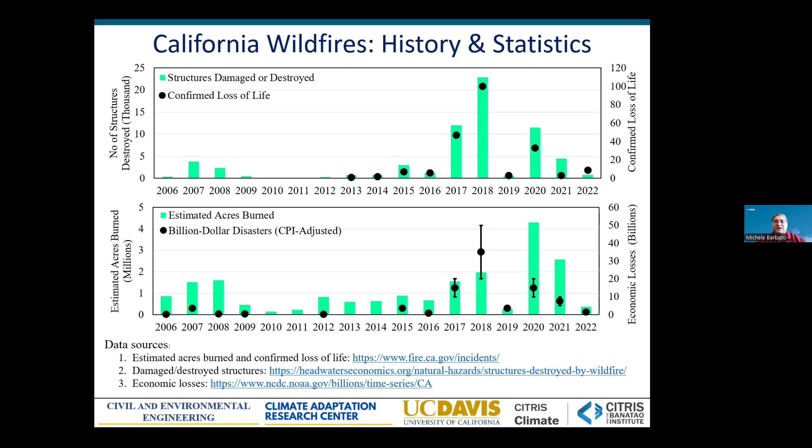Just to give an introduction to the problem, we have all seen from the news that wildfires are getting more severe, more intense, and are reaching communities. We have seen the LA wildfires just this year. So severity is increasing, and there are multiple causes. One is climate change, which is producing conditions that make wildfires more severe. But also a long history of very aggressive suppression of wildfires that has increased the fuel available in many places here in California and in the US.

And then a third tendency is the increase in construction, both residential homes and infrastructure, at the wildland-urban interface, the region where the built environment intersects with the natural environment and vegetation, and these are at the highest risk for wildfires. One important data point that is often neglected is the relationship between the damage produced by wildfires on the built environment and the direct consequences in terms of loss of life and loss of property.

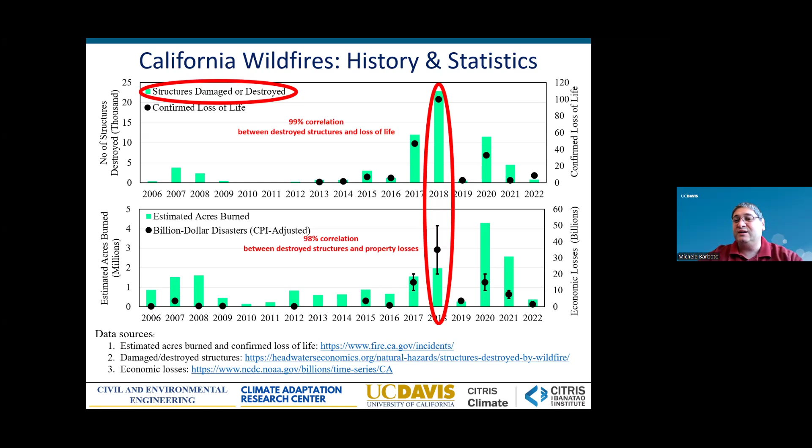So with this in mind, we started developing a research thrust on understanding how we can better protect our homes and our communities. As I introduced in the outline, we are taking two different directions. On one side, we want to understand and better model what is happening, particularly for what are typically called conflagration fires, where fire is driven by homes that are burning and becoming the source of fire for nearby homes, which is how communities are typically damaged. There is a need for assessment of these risks. Otherwise, it's very difficult to make science-based policy decisions.

And what we have found is that there are a lot of agencies from the state, from local governments, from federal government that are collecting data for wildfire applications. But as we unfortunately all know, there are a lot of silos that are communicating very little among each other. And so these data sometimes are simply incompatible and cannot be used for multiple applications besides the one they were developed for. So we are working on this framework to leverage the data that exists in order to have a better understanding of wildfire risk.

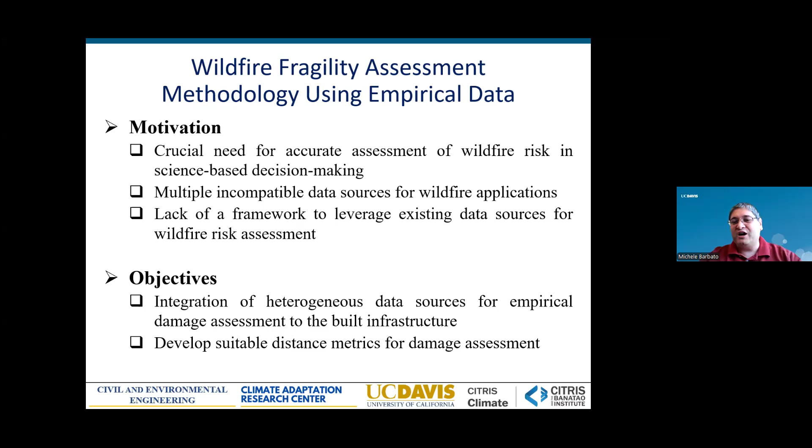So what are all of these data sources that I was talking about? We have data that are collected before, during, and post fires. There are defensible space audits. There are Microsoft footprints that can give us information on the dimensions of different buildings, etc. We have also information on vegetation. And this is all collected before any fire event, before even knowing where a fire event will actually take place.

And then there are data that are collected during the fire. So we know the location of the fire and we have information, for example, on the burn severity of the vegetation that is affected by the wildfire. And then post-fire, there are additional data collections done typically in the field or with satellite images that can give us information on the damage that has been exerted on different types of buildings, homes, and structures.

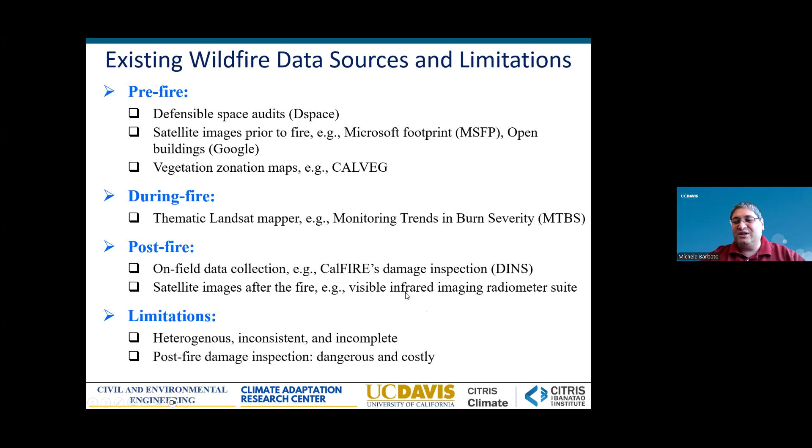The issue is that all of these different data collections are done for different purposes by different agencies. So there is not really a protocol to have similar data that can be used for other applications, like, for example, understanding the risk associated with wildfires. Some of these data collections are also very expensive and dangerous because they require physical presence of engineers, researchers, and other first responders after the fire has happened in a situation that typically is of destruction and thus complicated for data collection.

So what is really happening here? Just to give an example from the Tubbs Fire of the different types of data that we are trying to collect and put together. So on one side, we have the Microsoft information on the footprint that is given as polygons, so coordinates of corners. And these can give us the information on location of buildings and their size. We have then information that is given for the burn severity. The MTBS data set provides the fire perimeter and the burn severity with different types of data,

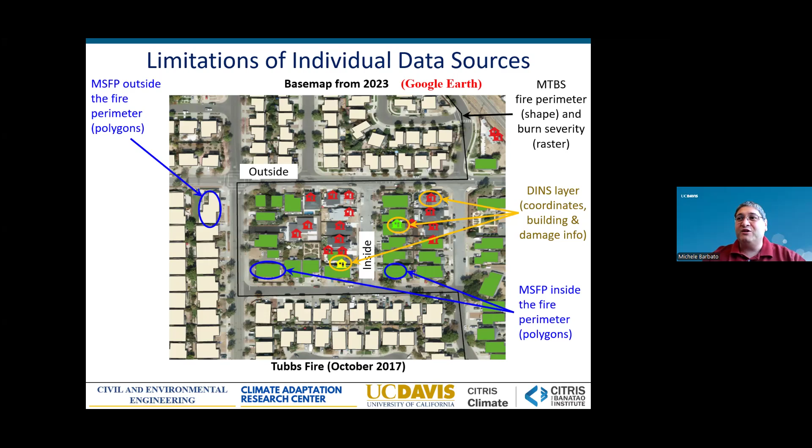different data types. And then we have the damage inspection layer, which provides coordinates of buildings, information on the characteristics of the buildings and the level of damage. And this is a little bit different depending if it is inside or outside the fire perimeter, because typically damage inspection is done only inside the fire perimeter. However, it is done at a time where the fire perimeter is not fully defined. And so there is some fuzzy region at the intersection between inside and outside the fire perimeter that needs to be adjusted in a certain way.

So why is there this need for adjusting, in addition to the fact that we need to make homogeneous a set of heterogeneous data? That is because there are buildings that can be missed in some of the different layers of data that we are using. For example, typically damage inspections do not spend a lot of time to inspect buildings that were not damaged. Now, that is a problem if you want to understand hazards and risk, because there is a non-survival bias that is introduced. We get a lot of information on what did not work, but we would like to have information also on what did work and why that survived. So we need to recover that information in different ways.

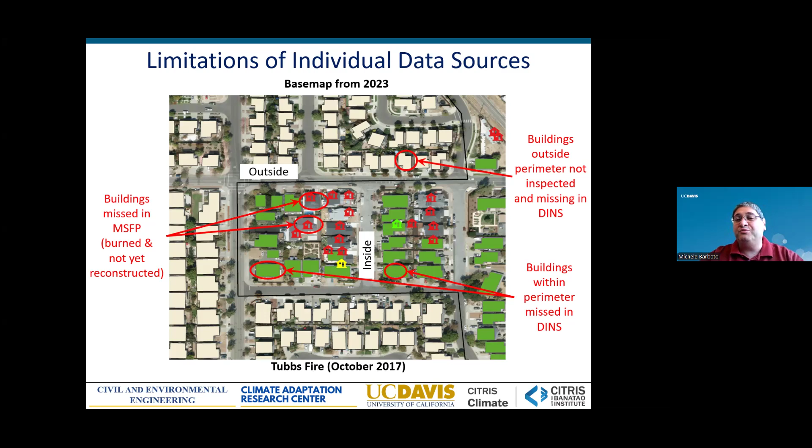Also, perimeter buildings that are outside of the official perimeter of the wildfires are not inspected. However, they were exposed to wildfire risk nevertheless. And so that's another layer of information that we miss to understand why wildfires were stopped at that level or why those buildings were able to survive. This is, though, a problem that is obviously quite severe at the edge of the fire perimeter, where it's difficult to understand what is inside, what is outside, because that fire perimeter, again, is typically not fully defined when the damage inspection is happening.

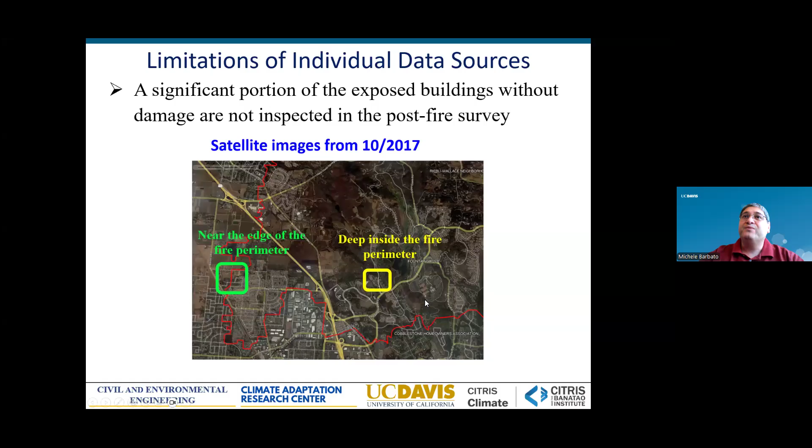However, this happens also deep inside the fire perimeter, where very often damage inspections for buildings that were not damaged are simply not done for various reasons. One is cost, one is time, one is that we don't have access to buildings that are occupied by their owners unless the owners are there to give permission to do that. And so a lot of that information, again, is lost, but is necessary if we want to perform a rigorous analysis of risk. So we need to recover these data.

And how do we do that? We need to go through several different steps that I'm going to try to describe here in what we are defining as a framework that provides us with a natural GIS tool to do this type of analysis. So we start with a Google Earth layer to have just the geographic characteristic of the location where the fire happened. And then we import into a GIS program or project the different layers that I have identified before.

In particular, we want to have the information on location and size of the different buildings and the damage inspection information that is available on all of the buildings that were lost or that were inspected even without damage. We also have to import the fire severity layer on the vegetation, which is giving us the information on the interaction between the built environment and existing vegetation. Also, all of these layers have different reference systems, so we need to rebuild all of the data into the same reference system so that they can actually be superposed.

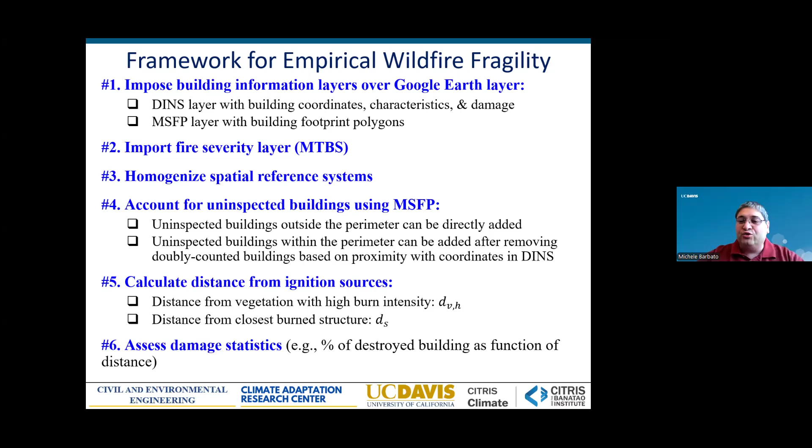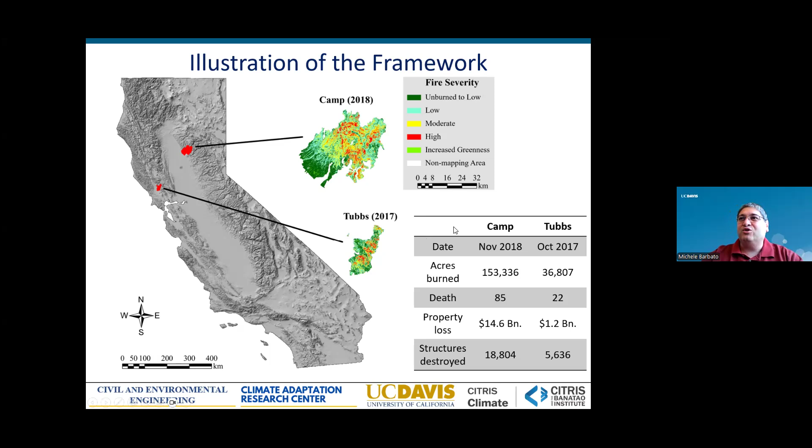So let's now show what this looks like when applied to actual historical fires. We considered two different fires, the Camp Fire of 2018 and the Tubbs Fire of 2017. Some of the information on property loss, number of destroyed structures. The Camp Fire is still the largest in terms of number of buildings that were destroyed, although the fires in LA, the Eaton fire and the Palisades fire together, probably are going to be very close once all of the information is collected.

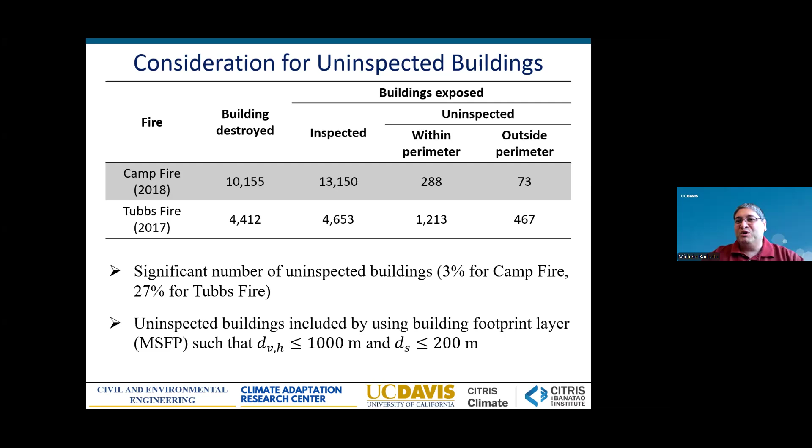So we started by trying to understand what is going to be the effect of including or not including the uninspected buildings. When we look at the numbers of buildings that were inspected or non-inspected in these two fires, we see that with the Camp Fire, actually, there was a big effort of trying to capture all of the information also on undamaged buildings. In fact, we figured out that only 3% of the buildings that were within the perimeter were actually not inspected. However, this number is significantly larger for the Tubbs Fire, where 27% of the buildings were uninspected. And so we expected to see small differences for the Camp Fire, but significant difference for the Tubbs Fire. And that was exactly what we obtained with our results.

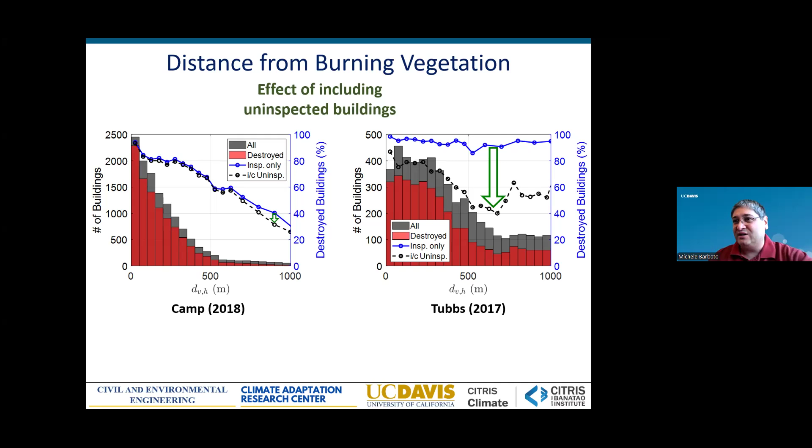And so now we can start understanding also for the Tubbs Fire that there is a dependence of the damage to the buildings on the distance, although it is not as clear as the one in the Camp Fire. And that tells us that just the distance from vegetation is not telling us the entire story. So that's why we also investigated the effect of distance from other burning structures to see if these fires could really be classified as conflagration fires more than as wildfires.

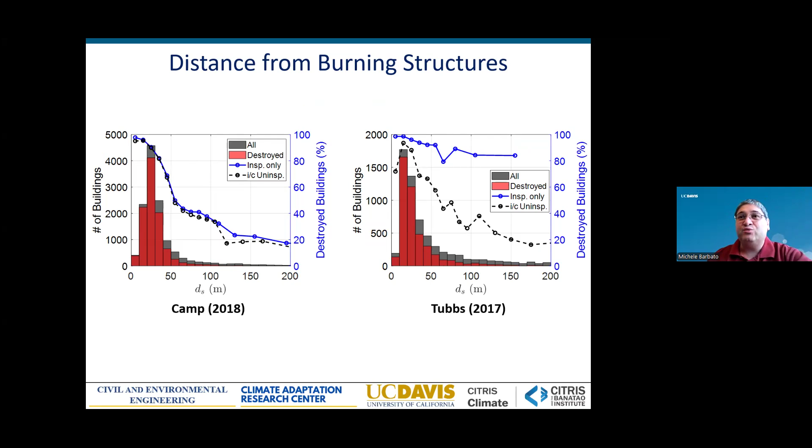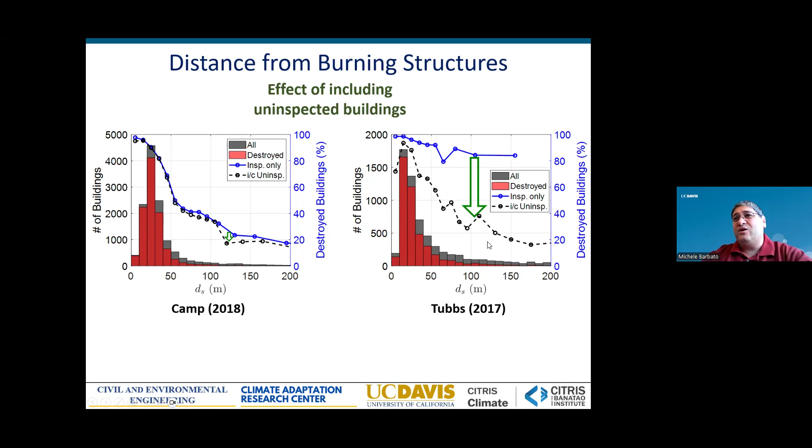And so also in this case, we found that the difference in the results between including or not including uninspected buildings is relatively small for the Camp Fire, with a much stronger dependence of the survivability of buildings on the distance from other burning buildings. And we find the same type of effect, but much more magnified, for the Tubbs Fire, where we start understanding that there was a strong driver, the distance between different buildings, in assessing if buildings were surviving or not.

So now that we have a little bit of a better understanding of how to evaluate the relationship between survivability of a building and distance from ignition sources, we can also investigate other aspects in understanding what is driving this risk for the different buildings. One thing we focused on was the presence of outbuildings. Outbuildings are fundamentally non-habitable buildings with a dimension smaller than 120 square feet that are located on a given parcel where there is another main building that is a habitable building.

So the hypothesis here is that since outbuildings with this classification do not require the implementation of Chapter 7A requirements, those that provide better resilience for buildings in the wildland-urban interface, these buildings are at a much higher risk to fire than the main buildings. Now, this wouldn't be a problem if the only thing that you lose is the outbuilding. Yes, it's never nice to lose anything in a fire, but typically these are sheds used for keeping materials and other things. So the risk to life by themselves would be low.

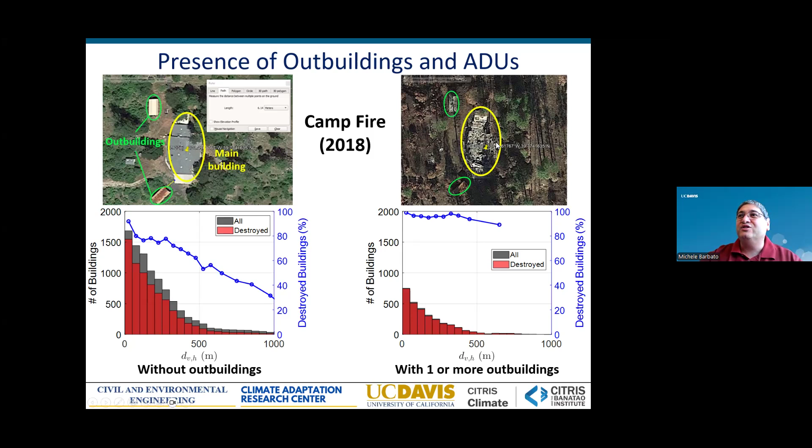However, if we look at buildings that had outbuildings, we find out that actually we lose that relationship. So the driving force is no longer vegetation that is burning, but as you can see on the right side, the percentage of destroyed buildings at a given distance practically becomes a constant, independent of the distance from vegetation. And our hypothesis is that this is driven by the outbuildings burning first and becoming the main source controlling the burning of the main buildings. So this is just the representation of the main buildings, the outbuildings on the property, and then the end result, that fundamentally everything burned.

Another application that we tried with our methodology is to see if we can identify the different ignition modes that are driving the loss of the different buildings. We know that there are three mechanisms with which fire can destroy a building. There is the most obvious one, that is contact fire, impinging flames from vegetation, nearby vegetation, or nearby buildings.

Then there is radiant heat. This is typically driving for fires that are driven by large trees that are producing a lot of radiating heat and are too close to the buildings, but also radiating heat that can be produced by nearby buildings that are burning.

And then there is ember attack of firebrands that are fundamentally driven by wind, can fly very long distances, and can kind of get all together in crevices or condensate around the surfaces of your building and produce ignition there, or penetrate through vents and other openings and then produce ignition of material inside the building.

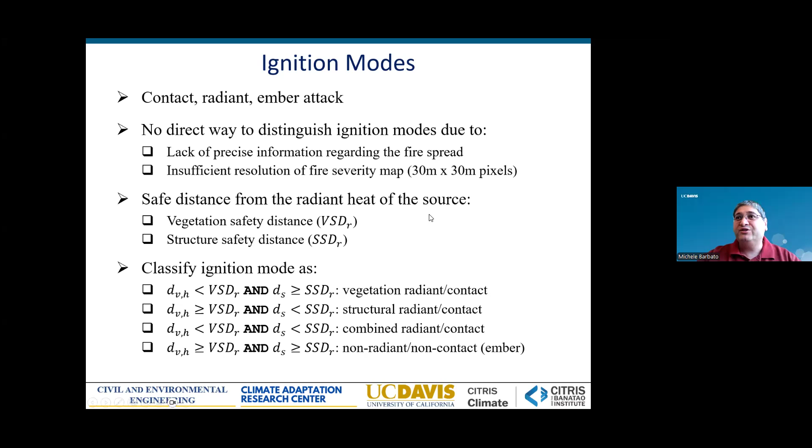Then when we were close to both vegetation and structures that were burning, we had the combined radiant contact ignition mode. And when we are far from vegetation and other buildings, then the only remaining possibility is a non-radiant, non-contact ignition mode, which is fundamentally driven by embers. So how does this analysis look for the Camp Fire and for the Tubbs Fire? It's really dividing the information into the 4 quadrants that correspond to the different types of ignition modes, which are here color-coded for an easier read of the information.

And then we calculated 2 interesting measures to assess the contribution of the different ignition modes, but also their severity. So the first information is the ignition mode contribution. It's the number of buildings that are destroyed and belong to a given ignition mode divided by the total number of buildings that were destroyed. So this is telling us the relative contribution of different ignition modes to the destruction of buildings.

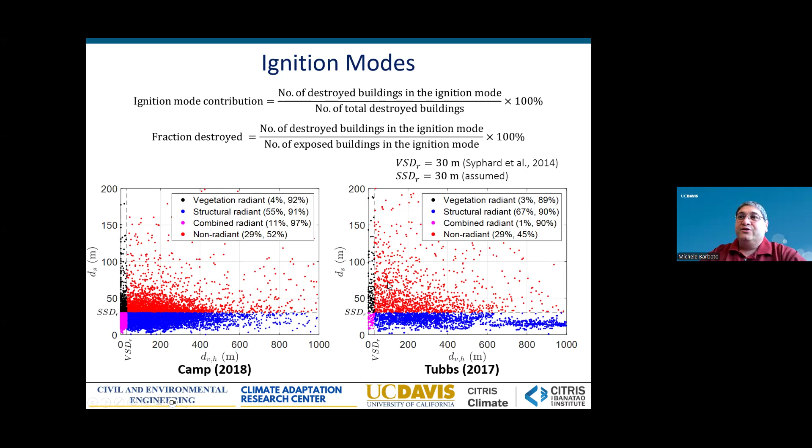So that's the information regarding the assessment of the risk. Now, what are we doing to reduce that risk? Our approach to that has been investigating different types of solutions, but the one that I've been focusing on the most within my research group is the development of fire-resilient construction techniques that are also affordable and sustainable. And that is because we do have a need, independently from wildfires, for affordable and sustainable housing.

And we want to have something that is more resilient to wildfires, because even in the best of hypotheses, homes that are wooden made and follow Chapter 7A requirements, we are at the point where the survivability of that specific building is only about a flip of a coin. It has been estimated in recent papers that the survivability of buildings that were pre-Chapter 7A is of the order of 10 to 12%. So 9 out of 10 buildings that are exposed to fire will burn.

And more modern, Chapter 7A compliant buildings have a survivability that jumps up to 52%. However, I doubt that any homeowner would feel very good knowing that the risk of their house being lost during a wildfire is just a little bit better than a flip of a coin. So we do want to have better homes.

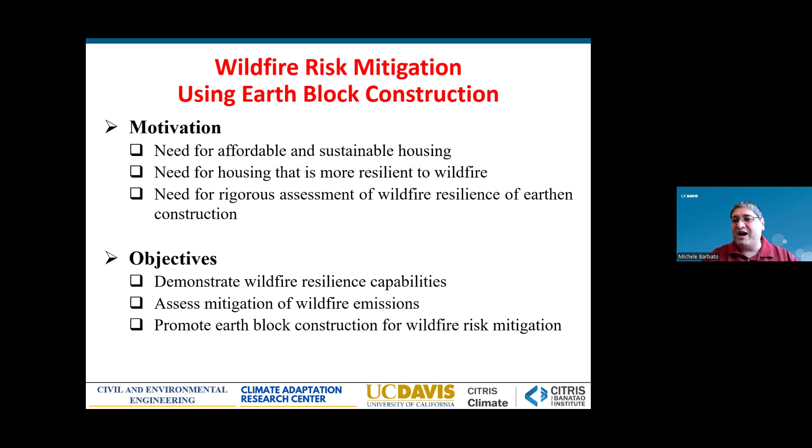And so what we want to do is investigate and demonstrate the wildfire resilient capabilities of this particular type of construction, quantify the additional mitigation that would be provided by using this type of construction, and in a certain way also promote earth block construction for wildfire risk mitigation. So what is earth block construction, or more generally earthen construction?

Earthen construction is fundamentally recovering a nature-based solution for home building that is based on the use of soil and clay. This is a very ancient, probably the most ancient construction technique after caverns, that has been used for more than 10,000 years. Even now, about 30 to 50% of the world population, depending on the sources, is currently living in earth-based dwellings, which are found all over the world.

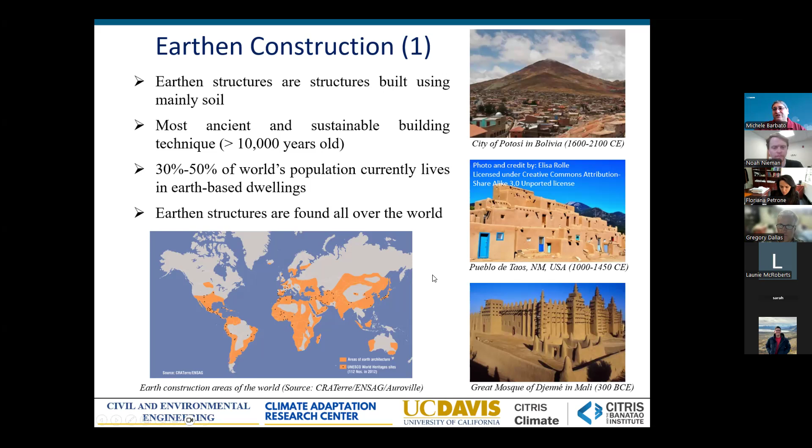This map that is shown here with the orange on gray is indicating all of the different places where earthen construction is found across the globe. And on the right side of this slide, you can see some historical examples of earthen constructions that have been built centuries, if not millennia ago, and are still standing strong. So we have a lot of historical success, but not as much information.

Also, there are different types of earthen construction that have been developed over the centuries: cob, rammed earth, adobe. I'm not going to go into the details, but fundamentally, cob is a construction of walls using layers of slurry of soil that are put one over the other until the walls are built. Rammed earth is fundamentally soil that is compressed on two sides into a given position, and a big example of that is the Great Wall of China, which is in many parts built using that technology.

And adobe is probably the most known one, where blocks and bricks are made with fundamentally clay and often natural fibers like straw. And then they are dried under the sun after being lightly compressed by hand or by foot. Now, we are not advocating necessarily to use the historical technologies. We are actually trying to use modern engineering knowledge and modern science to engineer this technology in a way that can be used in parallel as a potential alternative to modern construction materials.

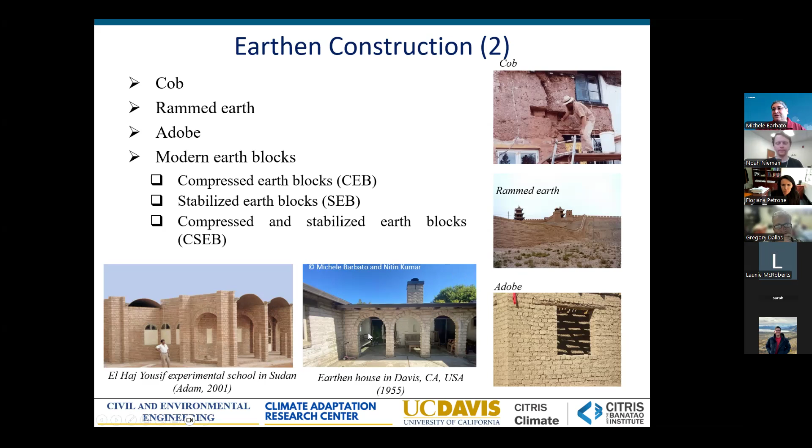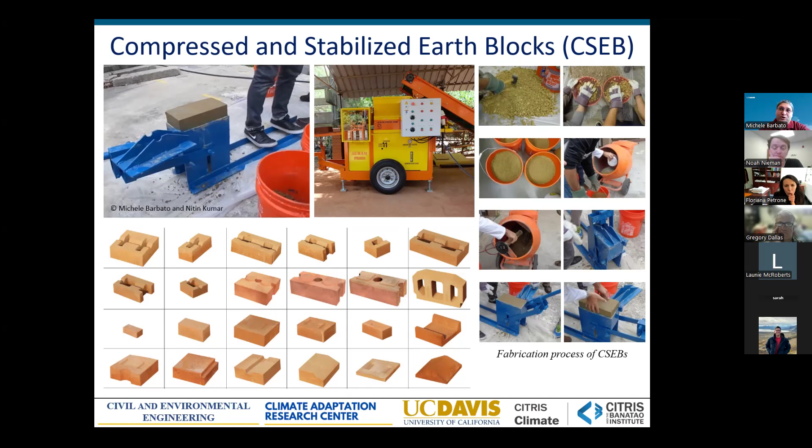Also, with the manual machine, we were able to produce 30 to 40 blocks per hour. With the hydraulic machine and 3 people working to just pour the soil on the conveyor belt, we can produce 400 bricks per hour, which is a big difference when we try to build things.

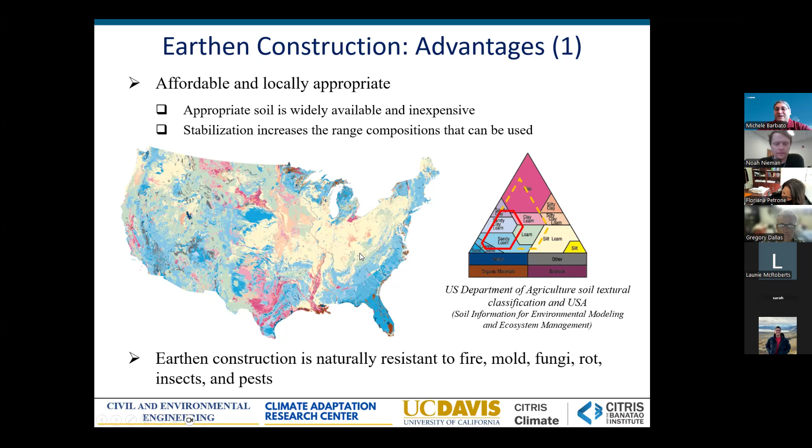Now, the result of that is that, unless you are building exactly at the deltas of big rivers where the soil is too rich in organic components and too silty, you can find soil that is appropriate for earth construction almost everywhere. And the soil that is used is naturally resistant to a lot of the different things that can be a problem with wooden construction. They're resistant to fire, to mold, to rot, to pests, to termites. So they are naturally more resistant, inert than organic material like wood.

Also, they are healthy and natural. They are a breathable material that is able to keep the relative indoor humidity always in the range between 40 and 60%. In fact, if the internal humidity is too high, this material is able to suck out the vapor from the environment in order to bring it down to 60%. And if the indoor is too dry, it releases back this humidity, bringing it above 40%. It does not produce any volatile organic compounds, which is very important for chemically sensitive people.

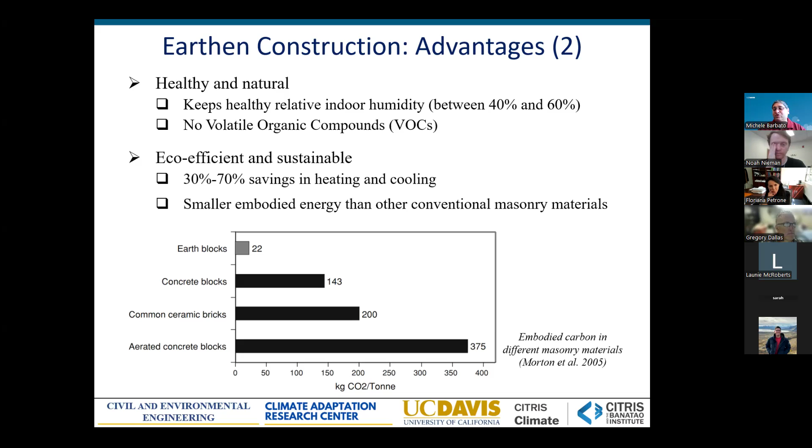It is also eco-efficient and sustainable. Given the high thermal mass, it allows, depending on the climate, a significant saving in heating and cooling, estimated between 30 and 70% compared with normal wooden construction. And compared with other masonry materials, which have similar properties except the healthy humidity, they have a significantly smaller embodied energy, at least an order of magnitude less than bricks and concrete masonry units, because the usage of cement is very low and the energy used to produce the bricks is only mechanical energy.

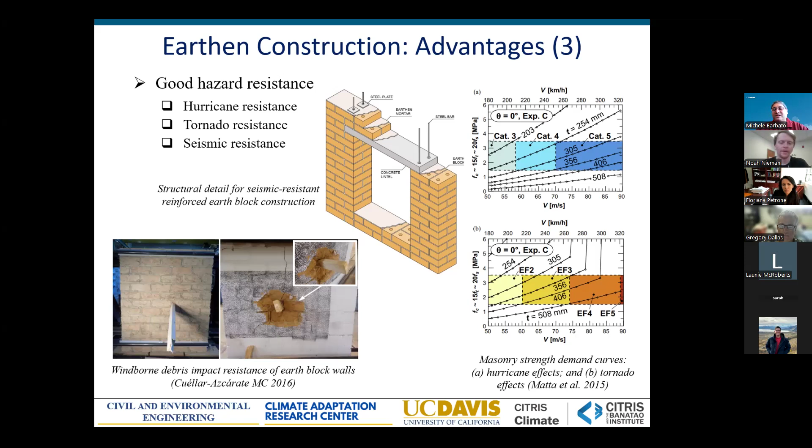In addition, recent research has shown that this material has good resistance to hurricanes, tornadoes, and seismic actions when used in conjunction with internal reinforcement. And so the question now is, can we investigate if they perform well also for fire? Now, I don't want to say that everything is perfect. There are also challenges. One challenge is the material is a natural material, so it typically has a higher variability of properties than other industrial materials.

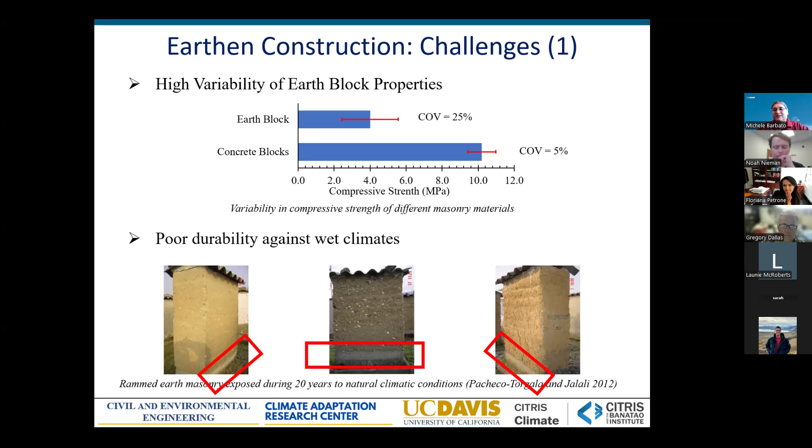Also, it typically has poor durability against wet climates, which typically requires the addition of lime and cement, which reduces the sustainability a little bit. So we need to know what is the right amount of cement or lime that needs to be added, so as not to produce material that is fundamentally greenwashed.

And then it is a masonry material, so it's characterized by brittleness, which means that reaching the peak then produces an immediate reduction in the mechanical properties. It is also, in the basic form that has been used through centuries, very labor intensive.

However, even though I want to discuss all of these different things, we have found technical solutions for each of these problems with new technologies that use interlocking blocks to reduce labor, addition of natural fibers to improve the brittleness, and quality control to reduce the variability of the properties, as well as a proper life cycle analysis to quantify the right amount of cement or lime that needs to be used for a sustainable material.

The major problem that we are still dealing with is really the widespread perception that earthen construction is a substandard choice. And this is mainly due to the poor performance of non-engineered earthen structures in other parts of the world, where, for example, in Turkey, they had a very poor performance under earthquake loads.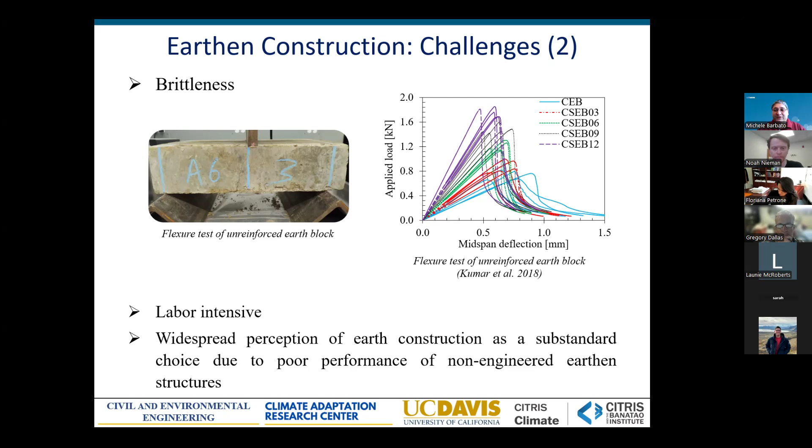However, even here, my point of view is that any material, when not properly engineered and designed, will perform poorly for loadings for which it was not designed. If you have structures in reinforced concrete or steel that are not properly designed for seismic actions, they will also perform poorly when subjected to that type of loading. So anyway, we went through all of this process, but I wanted to focus on the fire resilience.

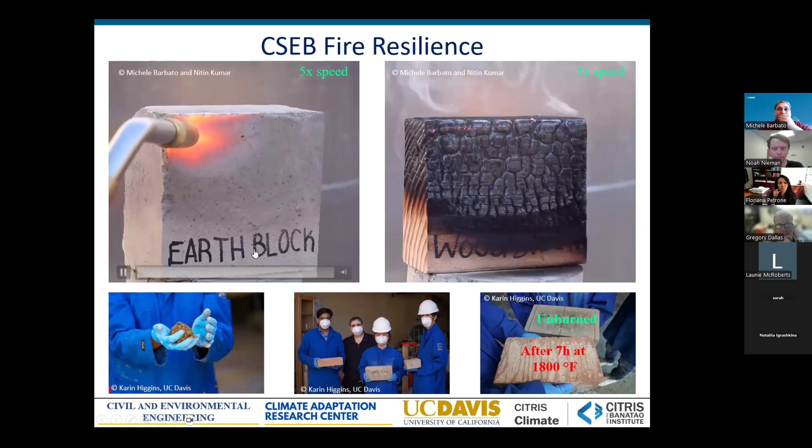And here you can see a quick and dirty test we did with a propane torch at 3400 Fahrenheit between our earth block and the typical wood blocks that are used for construction of wood-based buildings. And you can see that, as expected, the wood burns, and with the earth block the only thing you can observe is a little change of color.

And in fact, given this initial sanity check, we went and investigated the actual mechanical performance of this material when subjected to sustained high temperatures. We developed 60 specimens with natural soil collected from Paradise in California, the community completely destroyed by the Camp Fire of 2018.

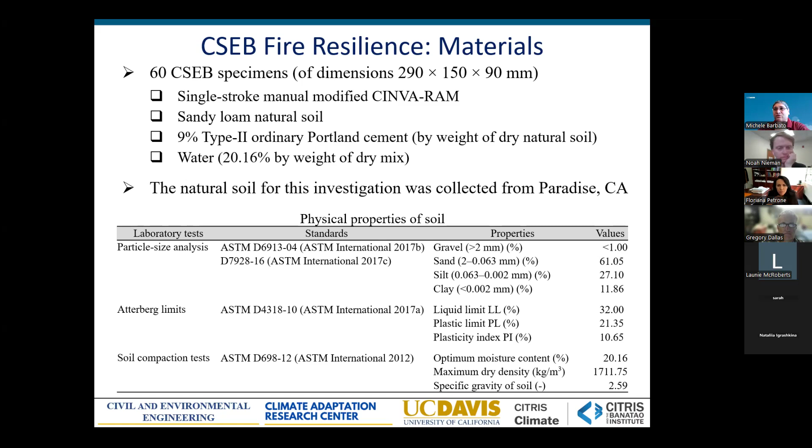And then we tested these blocks after exposing them to different temperatures. We left a group of blocks at room temperature, and then we subjected them to 200 Celsius, 400 Celsius, 600 Celsius, 800 Celsius, and 1000 Celsius. 1000 Celsius is 1832 Fahrenheit, which is kind of an upper limit for the typical temperature of wildfires that are only driven by vegetation.

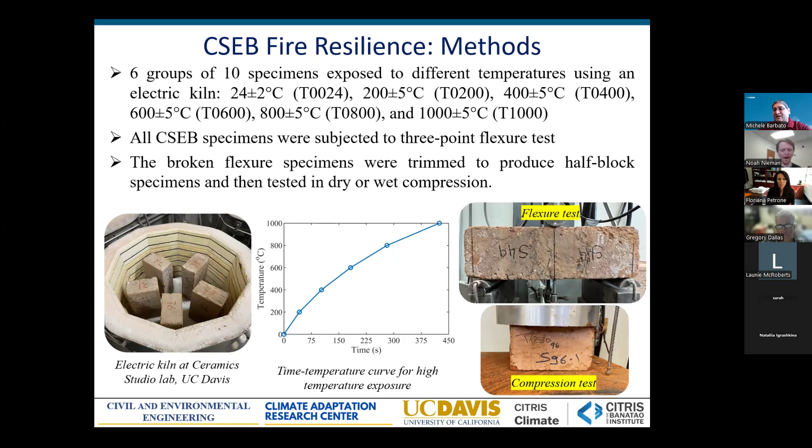And so we tested them under different conditions. First of all, in flexure, to understand how fire affects their brittleness. In compression under dry conditions, and in compression under wet conditions, which is typically the hardest test for this type of material. Here you can see some of the blocks tested at the different temperatures.

And here you can see this change of color from the typical brownish color of the unfired clay brick toward the reddish color, and this proceeds from the outside toward the inside until you reach, at 1000 Celsius, a uniform red color. Which in hindsight is simply telling us that the unfired clay brick transformed into a normal fired clay brick.

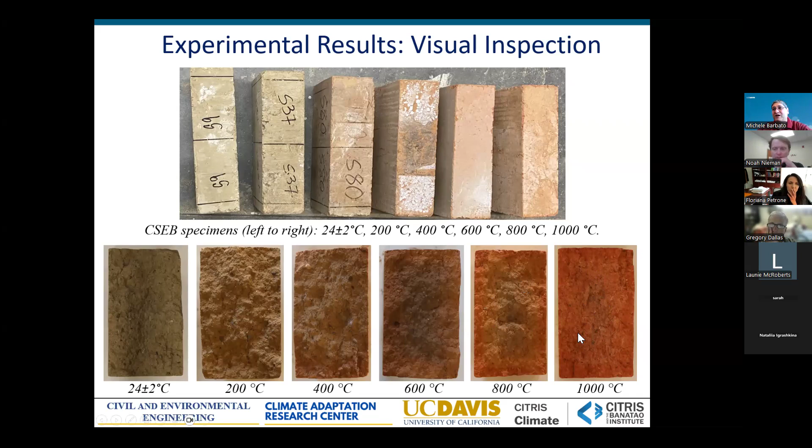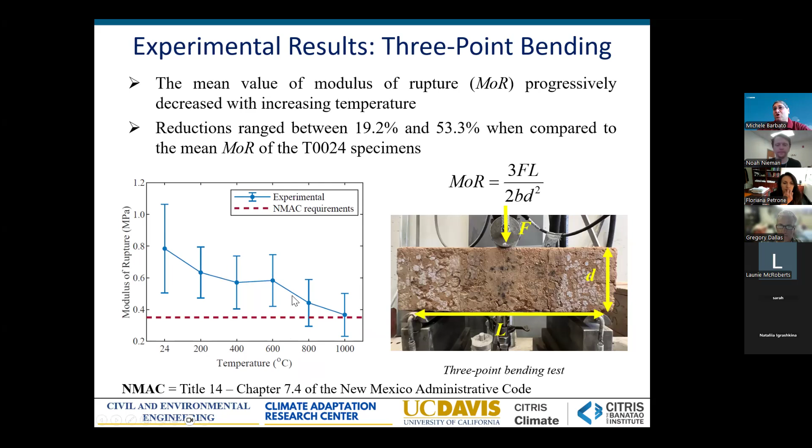And so we did all our tests. We found that there is a slight reduction in the modulus of rupture from the flexure test, although even at 1000 Celsius, we remain above the minimum requirement from the New Mexico Administrative Code, which is the only statewide code for construction using earth blocks and other earthen materials.

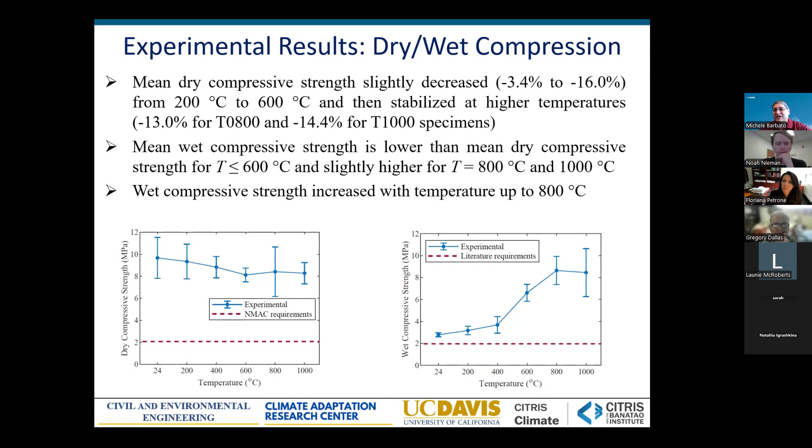For the dry compressive strength, we found a small but not statistically significant reduction in strength. And for the wet compressive strength, we actually observed a very significant increase in strength. And that is, again, because our unfired clay bricks are now becoming fired clay bricks, normal bricks, which are typically not weaker under wet conditions.

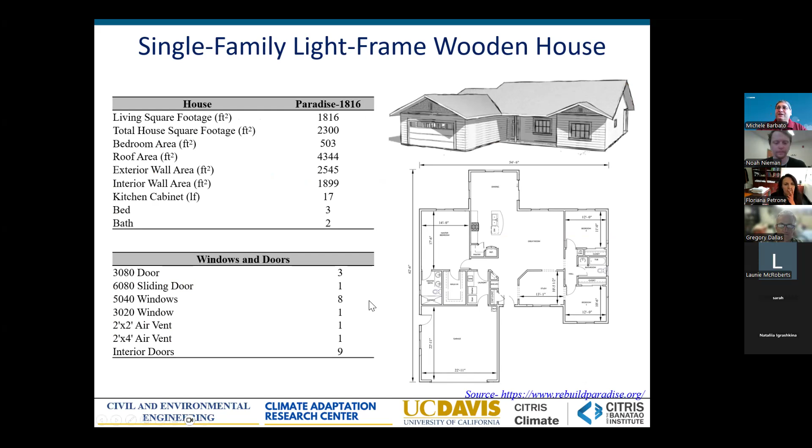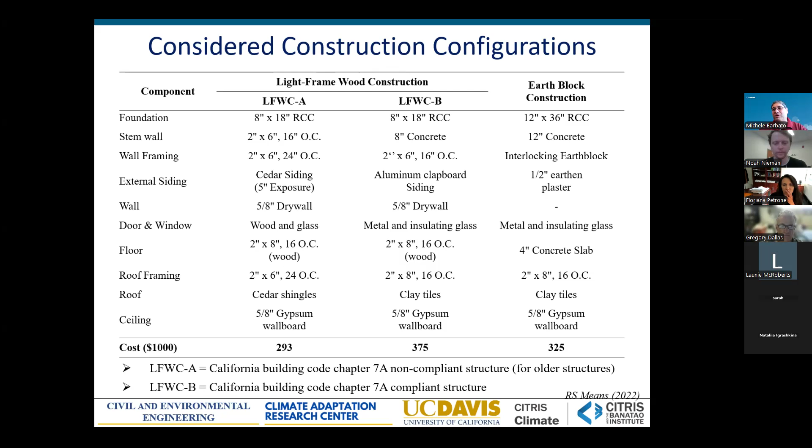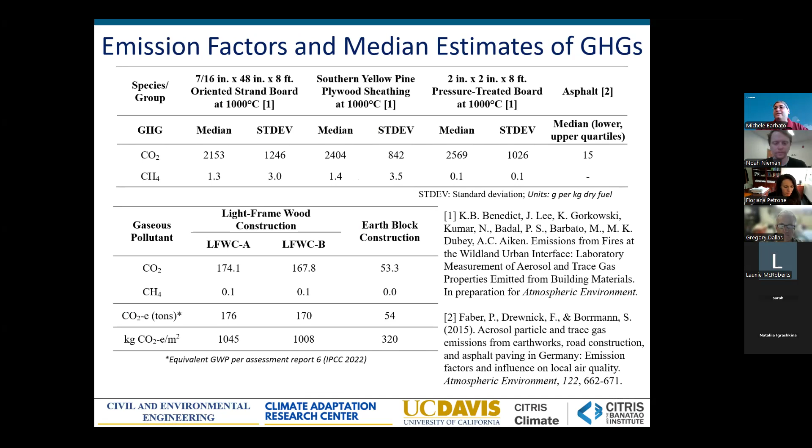And what we did was we took an actual house, single-family light frame wood house that has been rebuilt in Paradise. And then we analyze what happens when we build it without accounting for Chapter 7A, by being compliant with Chapter 7A, and then substituting wood with earthen blocks. And for all of these things, we tested the different construction materials in the lab to see the emissions per unit weight of the material, and then we scale it up to evaluate the emission that is coming from each square foot or square meter of our buildings. And we combine that with the embodied energy for construction.

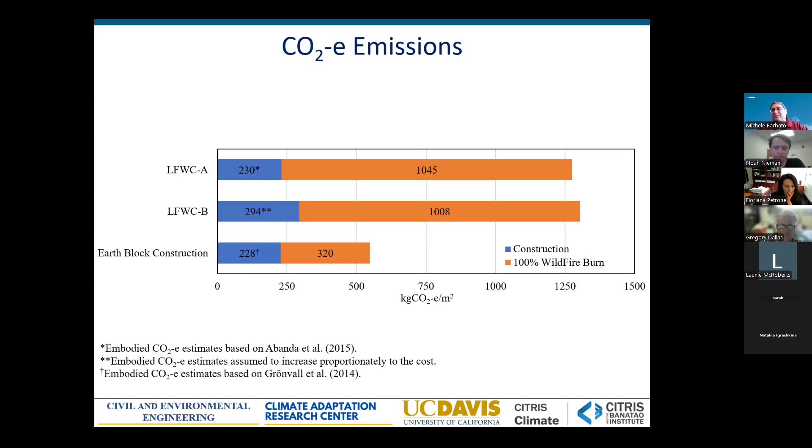So fundamentally, what we found is that the three types of construction start more or less at the same level in terms of embodied energy. But then if they burn in the wildfires, as you would expect, earthen blocks do not produce a lot of emissions. And so all of the emissions are coming really from the content, while the emissions that are coming from the construction itself are quite significant. It's about 3 times the emission that is coming from the rest of the materials that are burning.

And so just for conclusions, we developed this framework that we are using for developing wildfire fragility of different components of buildings. In this framework, we showed how to put together heterogeneous data sources in order to have a more accurate wildfire damage assessment of buildings. And we found that, as expected, the distance from vegetation and buildings correlate well with the survivability or with the losses in terms of destroyed buildings.

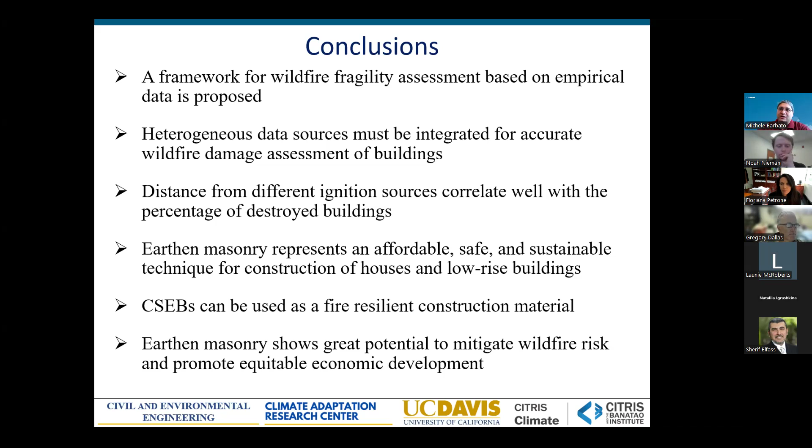Earthen masonry can be shown to be affordable, safe and sustainable for construction of houses and low-rise buildings. And our tests show that it can also be used as a fire-resilient construction material that has a great potential to mitigate wildfire risk while at the same time promoting equitable economic development.

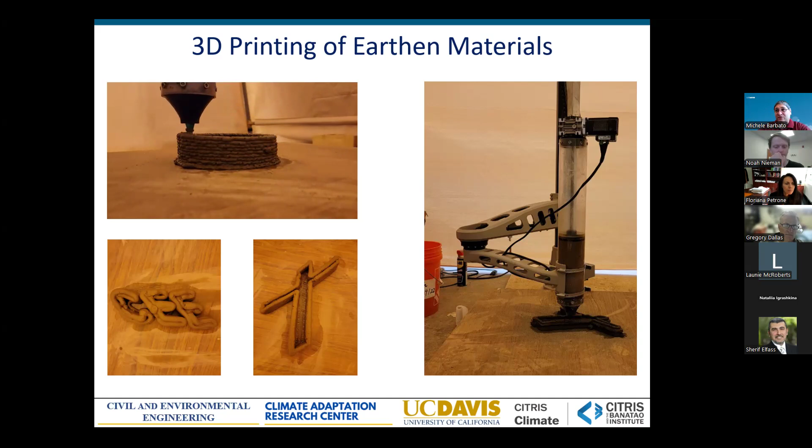Now, something really quick about the other ongoing research that, again, is not ready for prime time, but we are also working on developing a 3D printed version of these earthen materials. As you can see, that's our first product in terms of 3D printed dirt material with a very small auger. Now we are able to actually print out walls that are 6 feet wide by 6 feet tall. And then we need to be able to model this type of structures. And so we have developed a finite element micromodeling approach that allows us to predict pretty well deformation and load displacement responses of these type of walls, as well as the cracking shape in these walls.

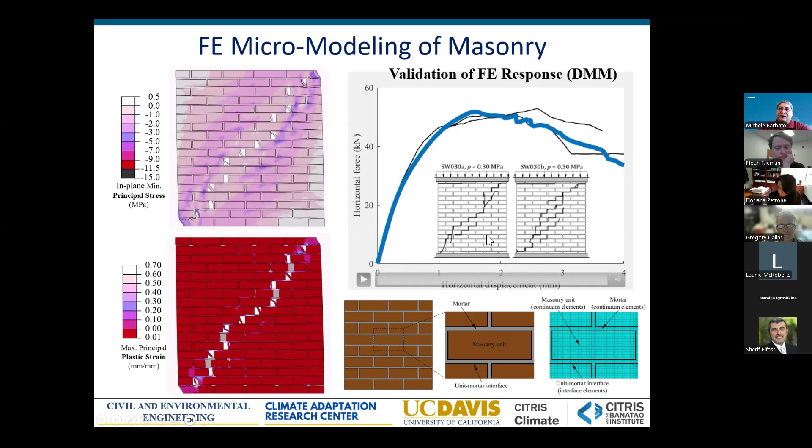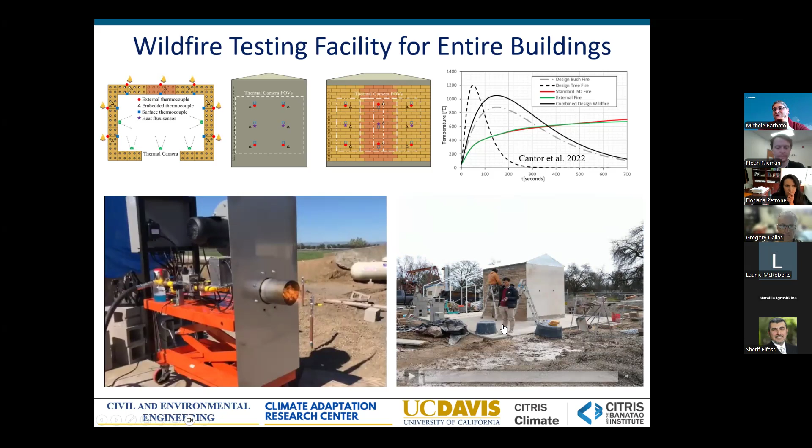And then the most recent work that is still under construction is a wildfire testing facility that will allow us to test entire buildings under wildfire conditions. And so we have a series of burners that are controlling the heat flux that is sent to the different structures. And here you can see on the right side the time lapse of the construction of our first benchmark, which is an earth block structure that will be tested under wildfires, probably at the end of this month or the beginning of the next one.